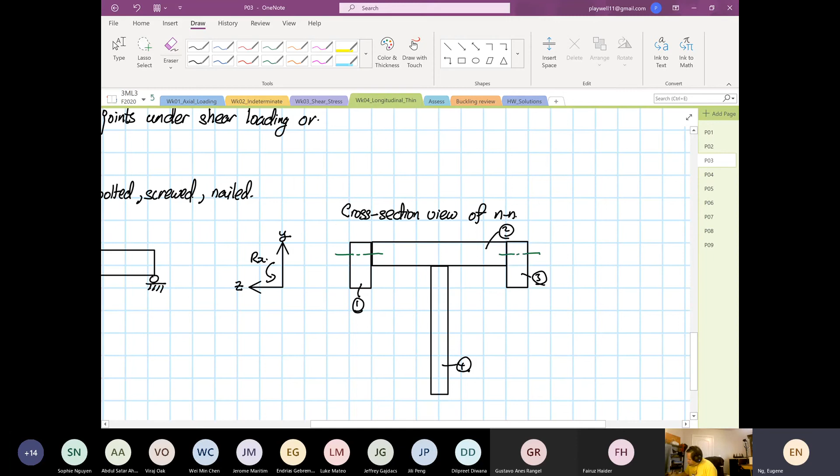So the way you join them is you can either use nails or bolts. Where the green line represents, okay, these are the fasteners.

Fasteners can be nailed. It can be glued, yes or no? Right, so sometimes you can glue them. So over here you can glue them. Okay, so this is glue.

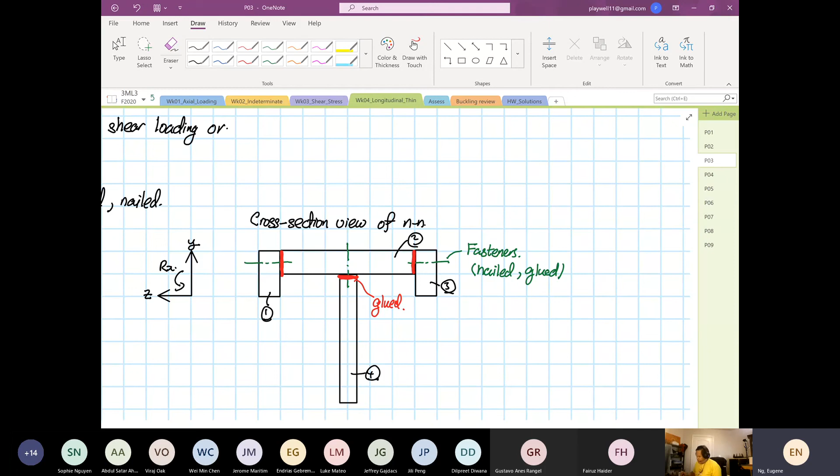So if we were to look into the nail, right, so basically for this section, this is the structure we're going to analyze. That is a cross-sectional view, and always remember this.

Failure will occur at the what? At the joints. Okay, failure will occur at the joints. You all agree or disagree with that statement? Agree, right, you agree to the statement, right?

If you are going against someone twice your size, twice your muscle, where will you hit this person? At the joints, yes or no? You don't go for his chest, he's not going to feel anything. You don't go for his head. Maybe head is okay, but you go for the joints.

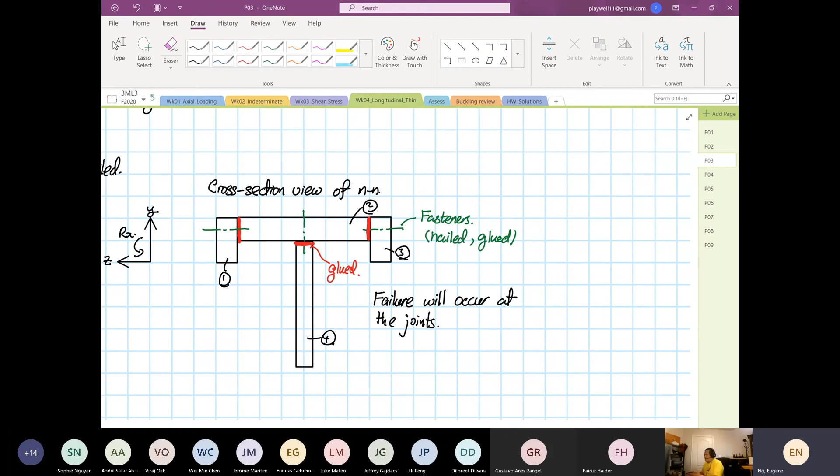That's why if you look at any martial art, it's not about how much strength you have, it's more on the technique. Ip Man, unbelievable. So you go for the joints, or the place of the weakest part. That's where it hurts most, and that's where failure will occur.

Likewise, we go for the joints. Now, so we are going to calculate the shear, the stress or strength of the joint.

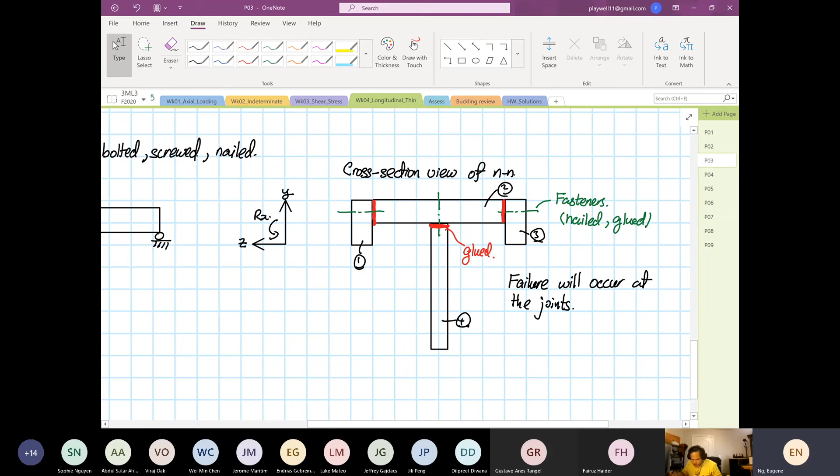I did a lot of consulting work with this knowledge for landscaping companies that are building large decks, or decks of a certain height that need calculation. I do a lot of this type of calculation.

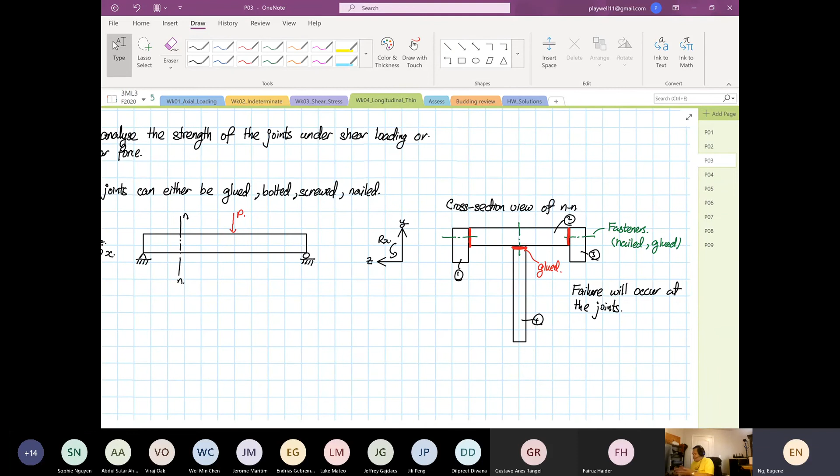So the calculation is for what? Right now, how many of you build your own decks? Right, so some of you do build your own decks. The thing is...

Can anyone tell me what is the spacing that you use for two fasteners? Anyone? What's the rule of thumb? It got quiet out there, no one building decks nowadays or what? 6 feet? 8 feet? Okay. So the spacing is all dependent on the load. When I calculate structures that have very heavy loading, this spacing does decrease.

Now, question for you guys. Does the length of the nail, the longer the length of the nail, improve the quality of the joints? Anyone?

I ask this: Changwu Park says, 'be safe, 6 to be safe.' Yeah, if you don't calculate, you put 6. If you do calculate, you might go up to 10. So now the thing is this.

Like, does the length—there's a critical length—does it mean that the longer, the better? Anyone? No, you're absolutely right, no, it does not matter. But as I said before, I did this calculation, I thought it will, but no, it will not.

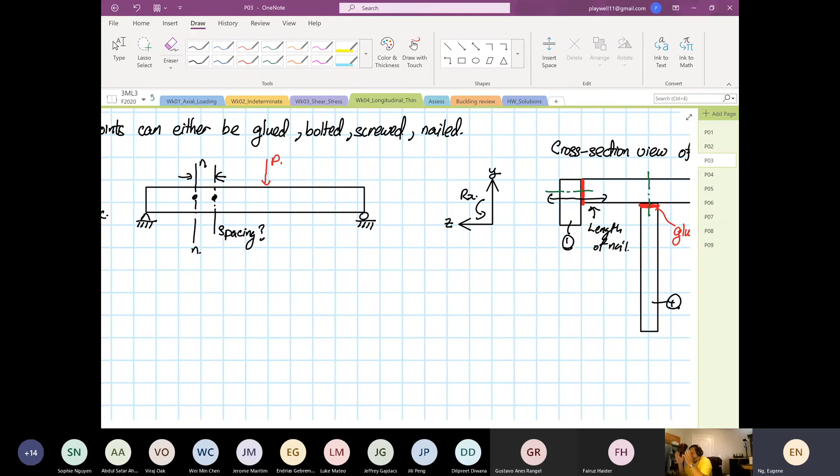After you reach a critical length, the longer you go does not matter at all. But you have to hit a critical length. Too short, it will matter, you will hit a critical length. Anyway, let's come back to here.

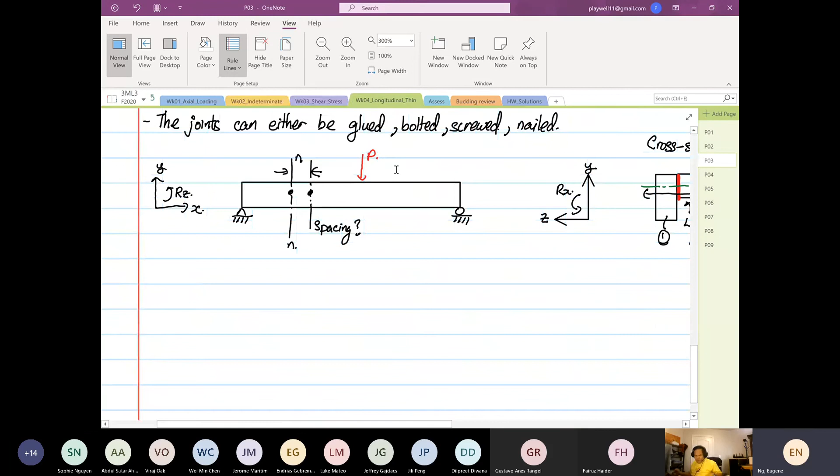Let's come back to here. So we are going to calculate the stress or the strength of the joints.

And the formula that we're going to use, the shear flow. Some of you might ask me why shear flow, but hold your horses first, okay? So we're going to use the shear flow first for this work. So the shear flow, Q, small q, is equal to VQ over I. We have seen this before, all of you have seen this expression before.

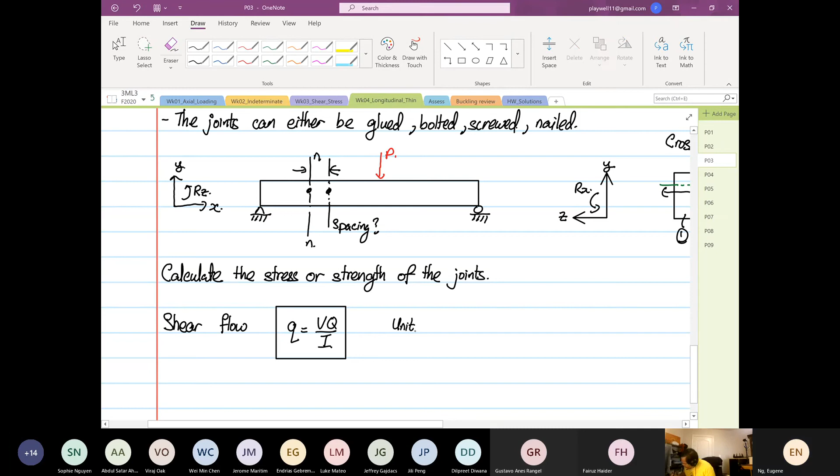So if we look at the units: V is in Newton, Q is in meter cubed, I is in meter to the power 4. The unit is in Newton per meter.

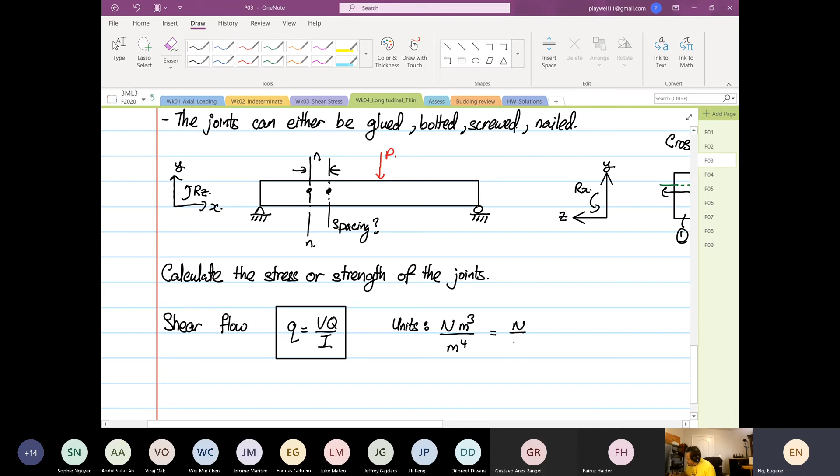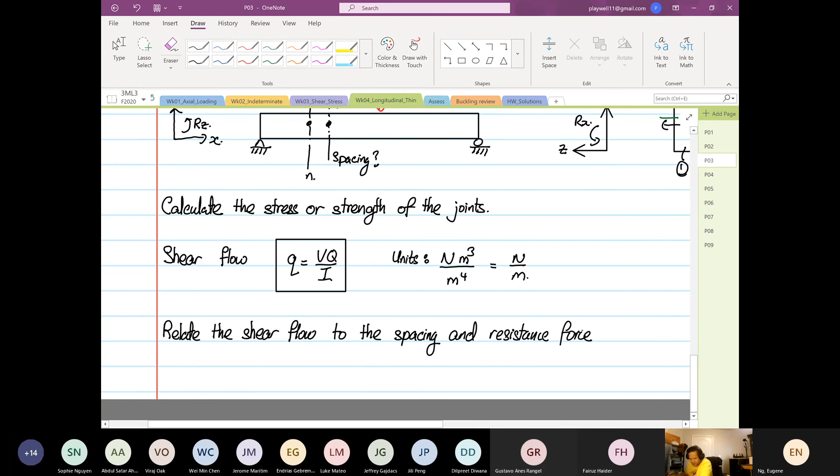So we can relate the shear flow to the spacing and resistance force of the nail. For this case, we are looking at the nail.

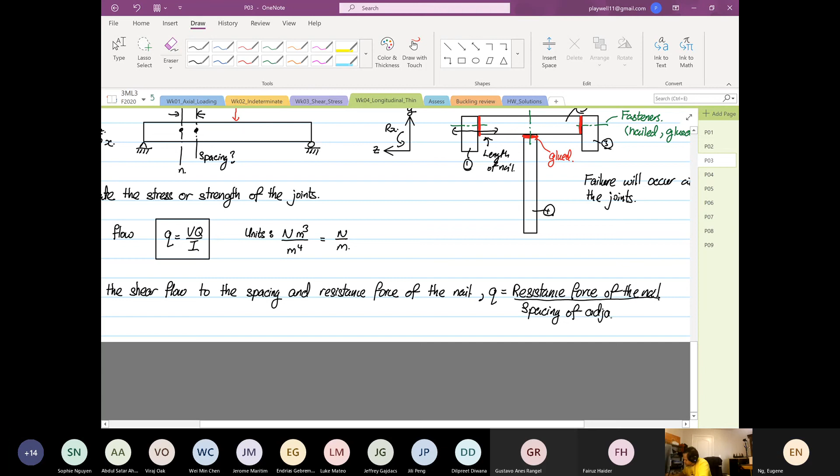So the formula, this is a bit lengthy: q is equal to the resistance force of the nail divided by the spacing of adjacent nails. So the unit is again, force is Newton, spacing is divided by meter.

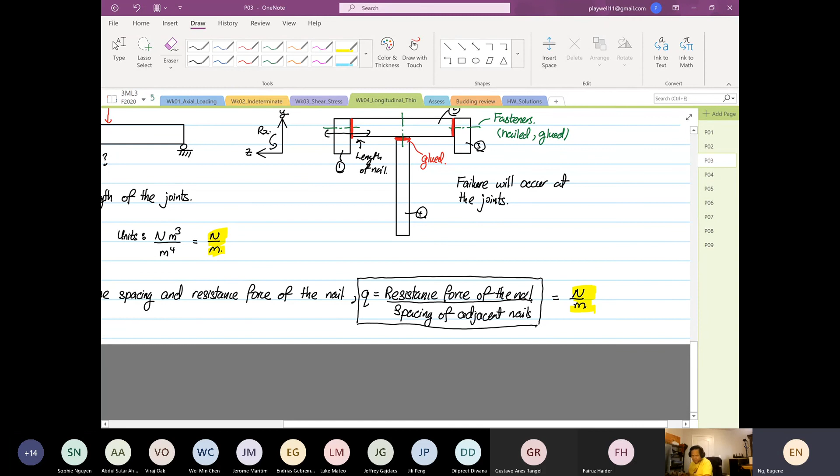So this is the only new formula that you see. We can equate both of them because the units are the same. And sometimes we might even use shear stress equal to VQ over IT for the analysis.

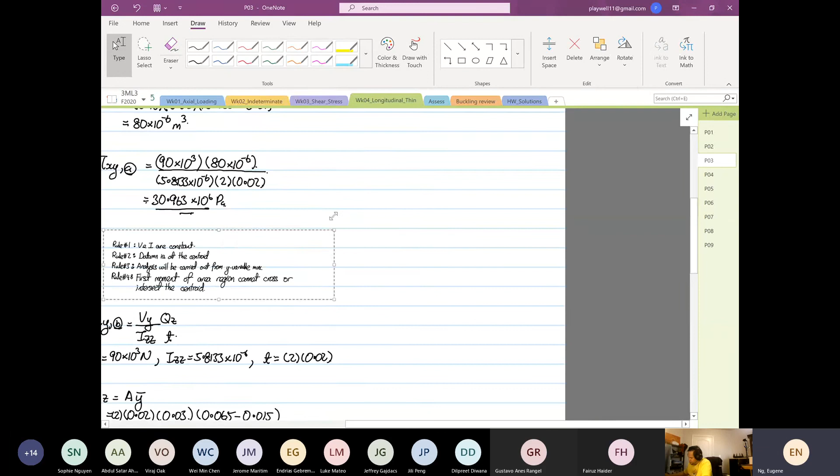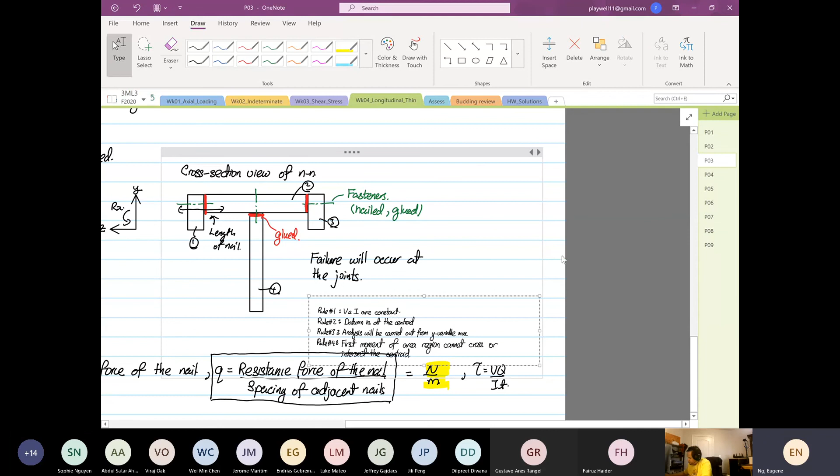So beside this, what is new? Nothing. We are still going to apply this same rule, remember this rule? It's such a beauty, the same rule that we have created.

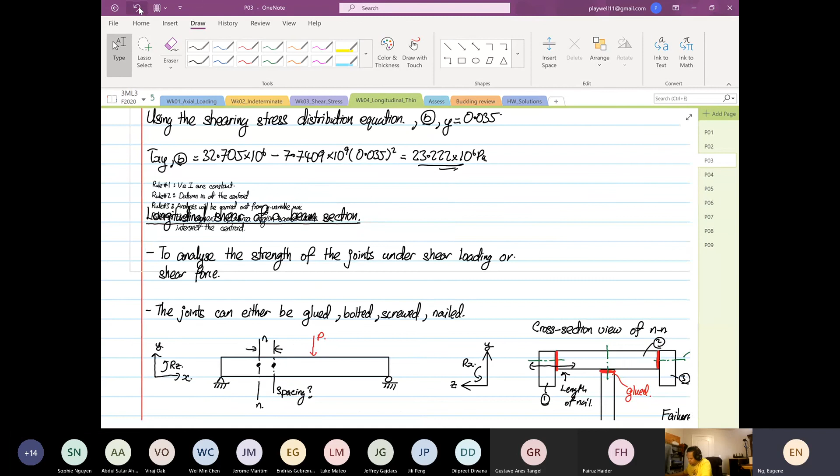I do apologize, it's messy. Let me stick it here. So the same rules, you still apply the exact same rules that I've written down here. The rules did not change at all.

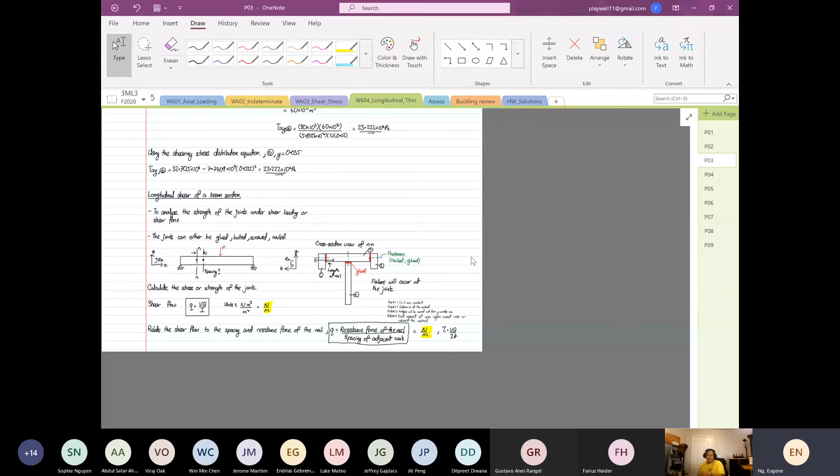That's the beauty, that's why mathematicians are very miserable. They have to derive an expression that represents anything and everything, then they're satisfied. All these are derived from mathematical expressions: rule 1, rule 2, rule 3, rule 4, and you can apply it to everything. Later on when we do thin wall, same rules, nothing changed.

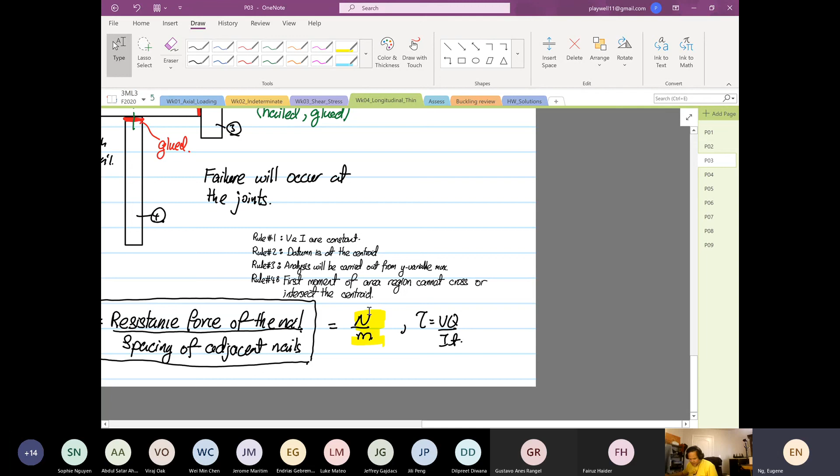Now let's look at another example. As I said, the only thing that is new is this, the rest is the same, no difference. Another thing I'm going to show you later is how to sketch the distribution of the shear flow.

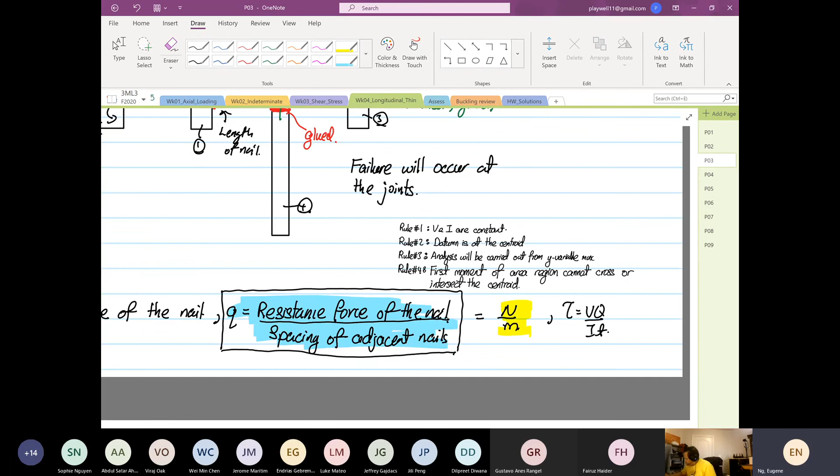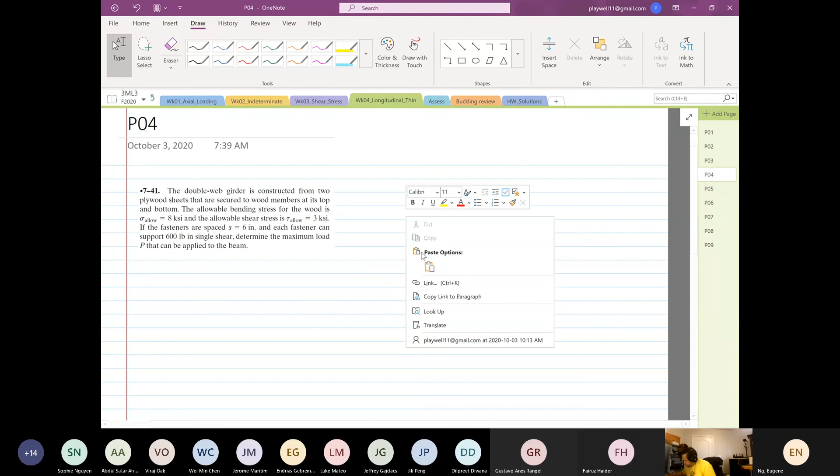Now, if you were to download on Avenue to Learn, I have all these images for all of you. So these are the examples. We're going to do this question.

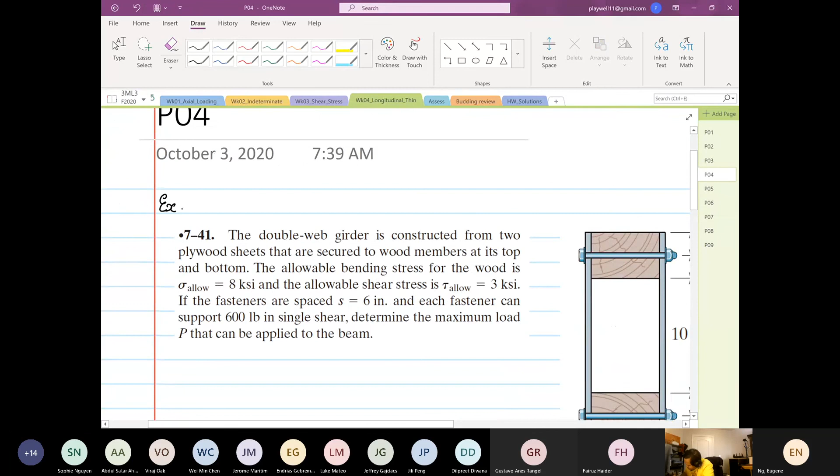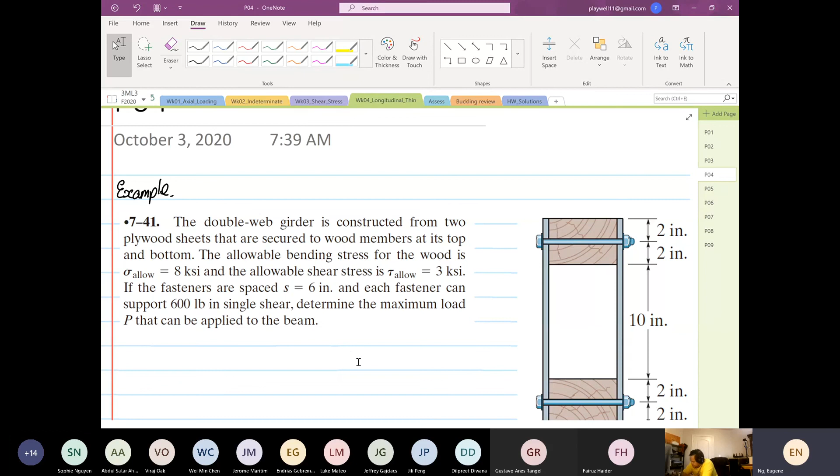We have a double web girder constructed from 2 plywood sheets. They are secured to wood members at its top and bottom. The allowed bending stress for the wood is 8 KSI, kilopounds per square inch, and the allowable shearing stress is 3 kilopounds per square inch. If the fasteners are spaced at 6 inches apart, and can support 600 pounds in single shear, determine the maximum load that can be applied to the beam. So this is a typical question.

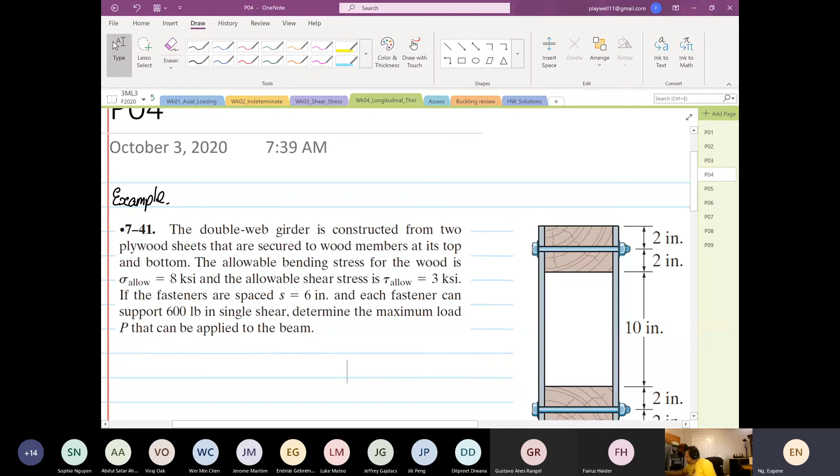So if we look at the cross section, everything is made from wood. This is our double web, one on the left, one on the right, and we have top and bottom. They are all made of wood.

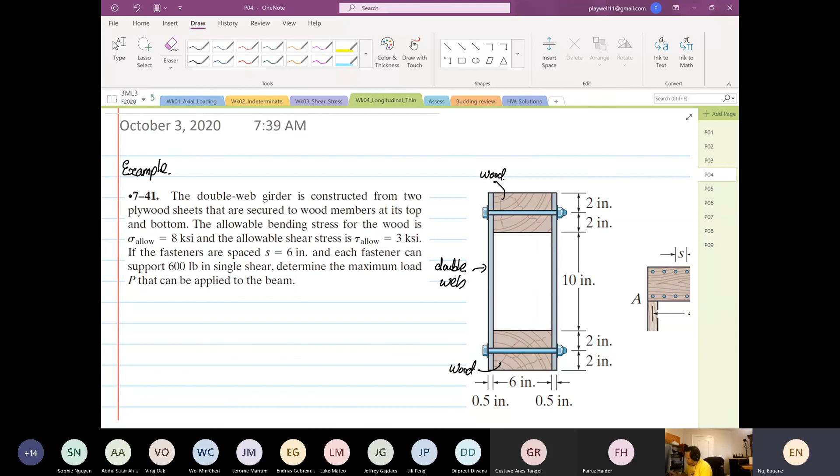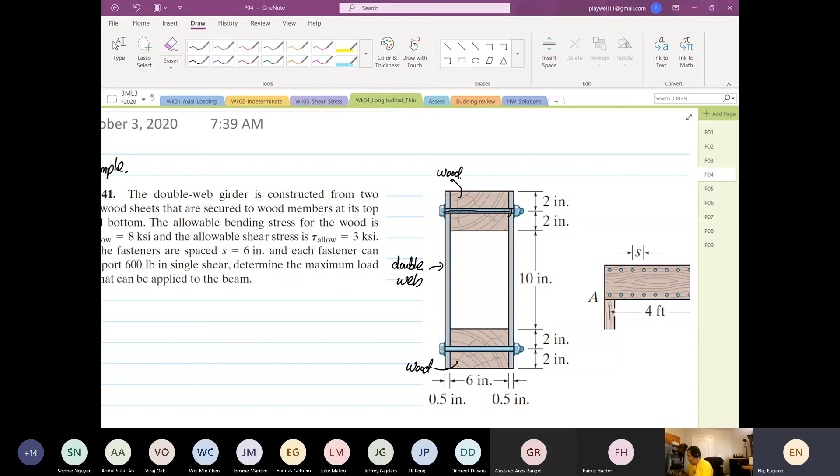If you look at this structure, it's not easy to construct a structure like this because every time there's a spacing, you have to drill a through hole from one end to the other, and you put in a fastener. This is just an example, you won't do this in industry, you'd just put a nail or screw on one side and the other. But this is how they're going to fasten it, this is the structure that has been given.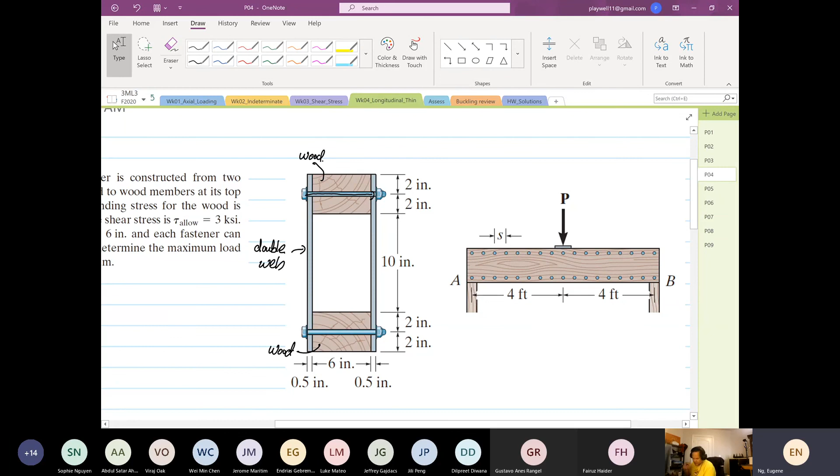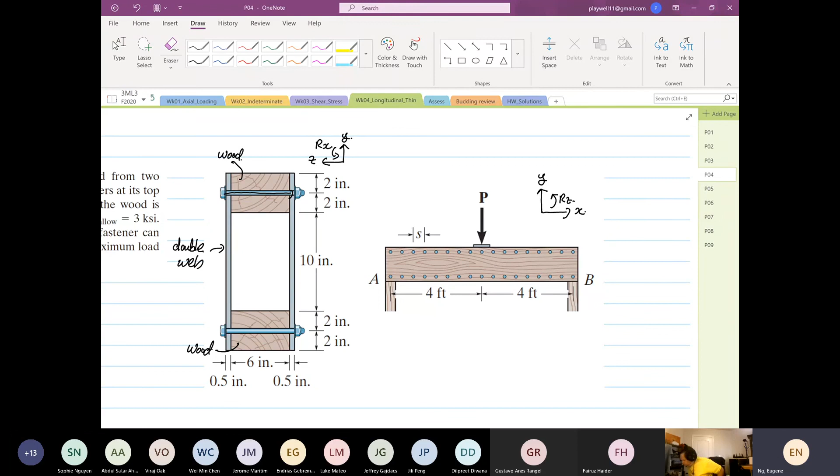So let's look at the information that we have. Some of you might say, what are we looking at? This is a bit confusing. This is our translation, X, Y, and rotation Z. This view here, the cross-section view, this is our Y, this is our Z, this is rotation about X. You can call it from the front view or the end view, either one is fine.

So what has been given to us is the normal stress. I want you to ignore the normal stress because I've not taught you bending yet. Let's look at the mode of failure. There are going to be 3 possible modes of failure, but we can only calculate 2 for now because the third mode I can only teach you after term test 1. So we're only going to calculate 2 modes of failure. First, mode number 1 is the failure of the joints.

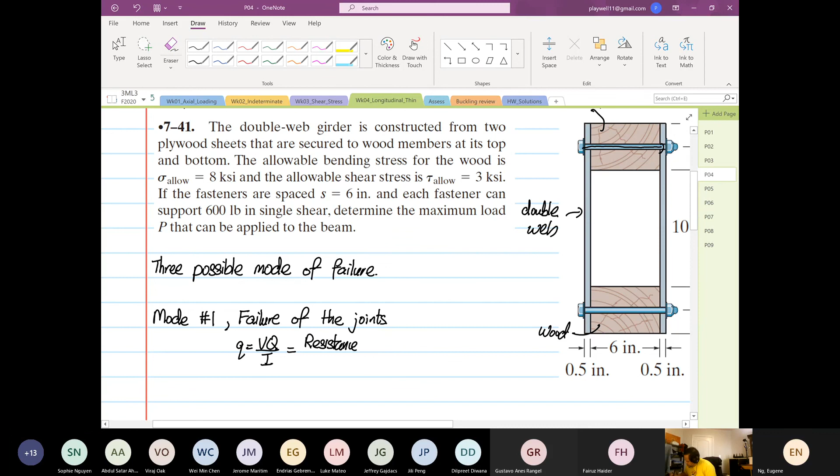And for failure of the joints, the formula that we're going to apply is q equal to VQ over I. And this can be equal to the resistance force of the...